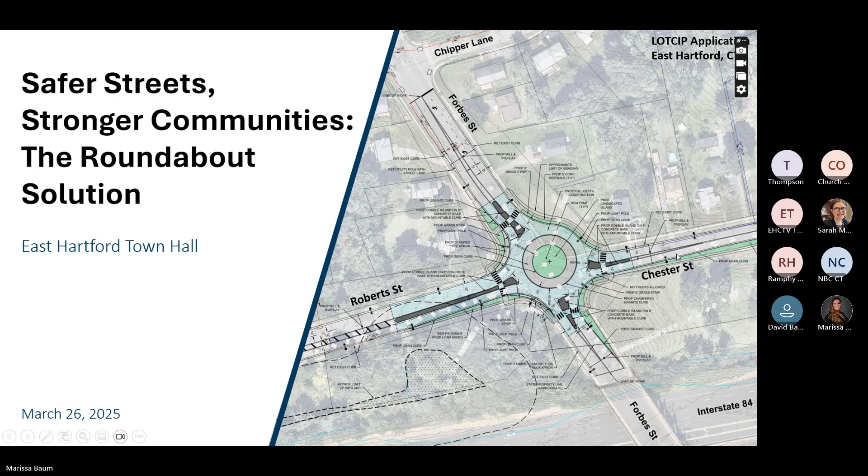Oh, thank you. All right. So my name is Jason Ouimet. I am a senior project manager with the Beta Group. Beta provides engineering design services for several municipalities throughout the state, including the town of East Hartford. Joining us today is Scott Bushee. He is a principal engineer and chairman of the Roundabout Committee at Connecticut DOT with over 2 decades of experience planning and designing roundabouts throughout the state.

As I mentioned earlier, we are also joined by Honorable Mayor Connor Martin, along with Alex Trujillo, Director of Public Works, as well as Mac Hawkins, Chief of Police, and Doug Wilson, Town Engineer. So right now, I'd like to hand over the presentation to Scott Bushee to discuss the operation, safety and public benefits that roundabouts provide throughout the state.

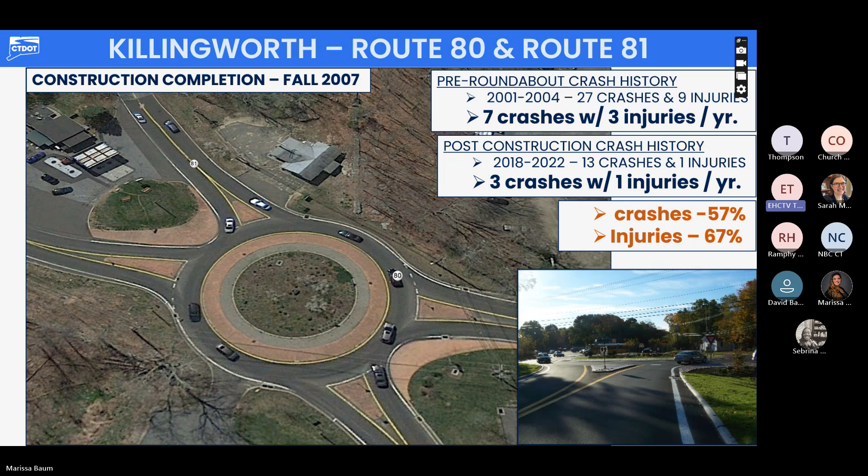And when I see crash reduction, especially injury reduction, that's success, right? Somebody didn't get hurt, somebody didn't go to the hospital, somebody's able to continue on with their life that day, and that's somebody's family member. So that's important. Another location we have, this one was in West Haven, Connecticut. Another one we looked at.

It had problems with left turning vehicles in and out of the side street. People were having a hard time finding a gap. We had a motorcycle fatality here. And the initial request was to put in a traffic signal. And we knew with the radius of that roadway, the geometry, the higher speeds, that the signal wasn't really the safest solution. We built a modern roundabout and had great results with it. We reduced speed significantly.

We shortened the pedestrian crossings, making it safer. They're actually two-stage crossings. We've got that nice gateway treatment with the flagpole and plantings. That really became kind of an anchor for those businesses on the corner as well. Over the last decade, after we built that, I watched several of those businesses grow and expand. They have outdoor dining, new businesses came in after.

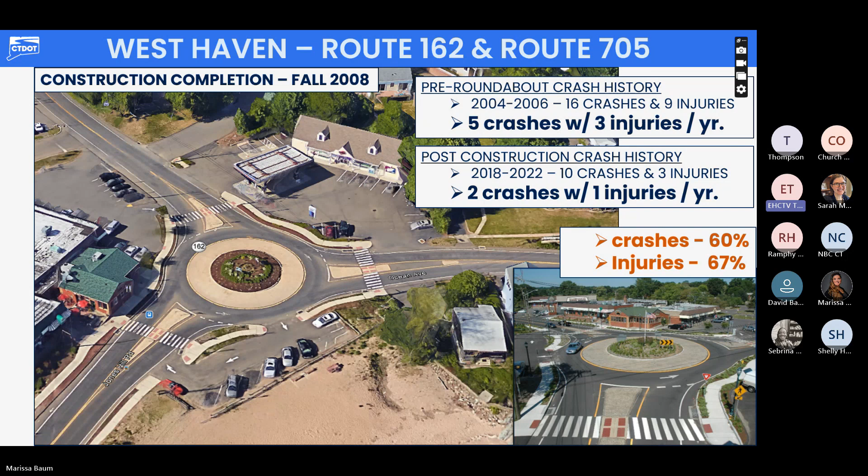The opposite side had kind of a dilapidated gas station repair garage that was bought out by a convenience store and all rebuilt, remodeled, looked beautiful. So that worked out very well. Reduction in crashes by 60% and injuries by 67%. Certainly a success there in terms of safety.

Roundabouts are safe because they're lower speed. And what we learned from studying crash data, if a pedestrian or a cyclist gets hit and the speeds are around 20 miles an hour, 9 out of 10 survive. If a pedestrian or cyclist gets hit and the speeds are around 40 miles an hour or higher, only 1 out of 10 survive.

So think about our traffic signalized intersections. When it's a green light and we're going through that on the green light, what kind of speeds do we have? So if we can employ more roundabouts and get the speeds down to 20, 25 miles an hour, 9 out of 10 pedestrians survive if they're involved in a crash.

Bicycles do very well in roundabouts. If we look at that teal line going through in the middle, that's the woman up in the top right corner. She's an avid cyclist, very experienced. She's riding through the circular roadway with traffic at speeds 15 to 20 miles an hour. She can do that, keeps right up with traffic. That's the safest place for a cyclist to be in the roundabout, being seen right with traffic.

The gentleman in the middle of the picture, he's kind of pushing his bike on the crosswalk. Maybe he's a little less experienced, a little less confident. He's going to exit the roadway at the crosswalk, go up on the sidewalk, become a pedestrian. Then at the crosswalk, he's going to look to his left. If it's clear, he's got a gap. He's going to cross to the center island, which is an area of refuge.

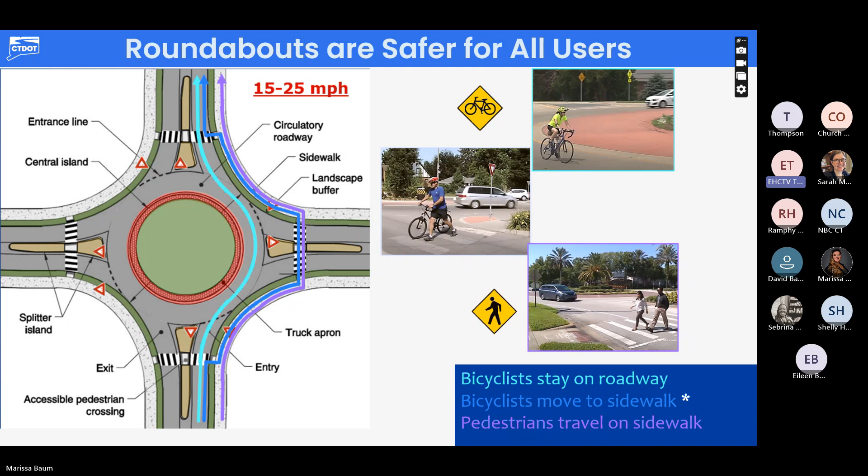Meanwhile, the pedestrian's crossing behind the vehicle, out of the space of the driver making the decisions, which is a big difference between roundabouts and traffic signals. If you're at a traffic signal and there's a crosswalk, that crosswalk's in front of the vehicle and in front of the driver whose eye is looking up at the light to see if it's going to turn green and they can go.

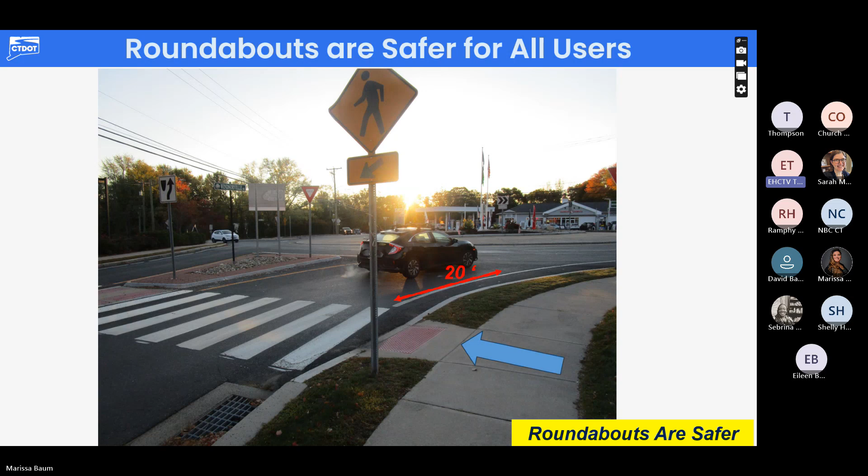And maybe that driver's also looking to their left to process vehicles coming at them, and are they going to stop? And maybe a pedestrian steps off the crosswalk on the right side of that vehicle as the light turns green. All these decision-making processes going on and the crosswalk's in front of the vehicle. Roundabouts, it's at the rear of the vehicle, significantly safer in addition to the lower speeds.

I mentioned it's a two-stage crossing. You go out to the center island, that's your refuge area. You can take a break, stop. You look to your right. If it's safe, whenever you get the gap, you go. You don't have to cross the whole roadway at one time.

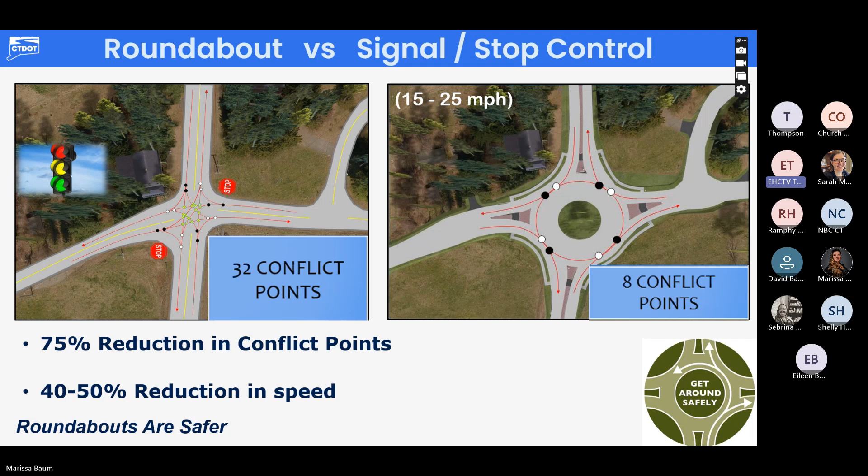Roundabouts have fewer conflict points because we've eliminated the left turns. All turns at roundabouts are right turn entry, right turn exit. With that, you don't have the crossing maneuvers. This eliminates the T-bone type crashes, the severe sideswipe crashes that would occur. So we get a 75% reduction in conflict points and a 40 to 50% reduction in speeds at most roundabout locations. Another win for safety.

Another location not too far from us, Ellington, Connecticut, the old Five Corners. This was stop controlled.

Horrible capacity. We built a modern roundabout, nice gateway treatment, municipal signing. The congestion cleared up, went away. Reduced injuries by 70%, but this one really made traffic operations much more efficient. At a roundabout, you pull up to the yield sign, look to your left. If it's clear, you go. Very simple. Multiple legs can enter the roundabout at one time.

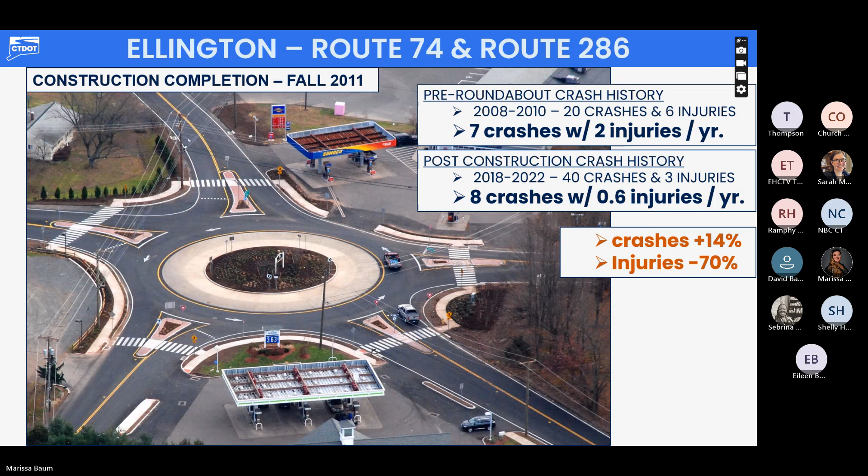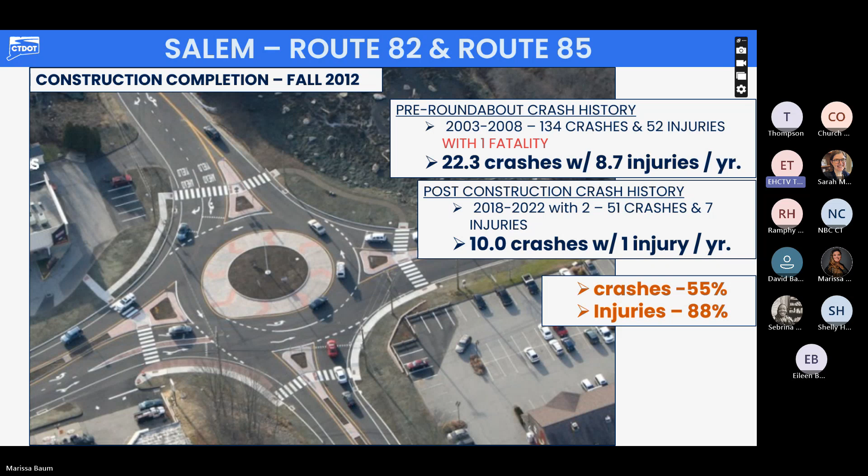55% reduction in crashes, but 88% reduction in injuries. That's big. That intersection had over 22 crashes a year as a traffic signal. We get it down to 10 by putting in that roundabout. It's a lot of lives saved. People didn't get hurt.

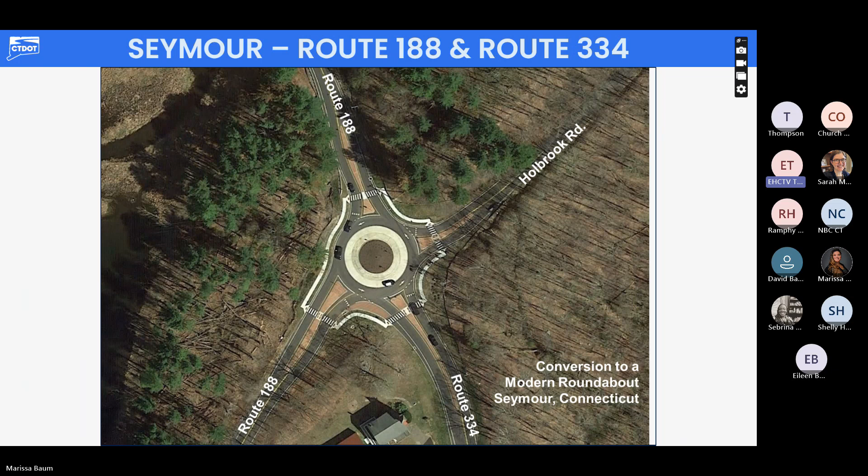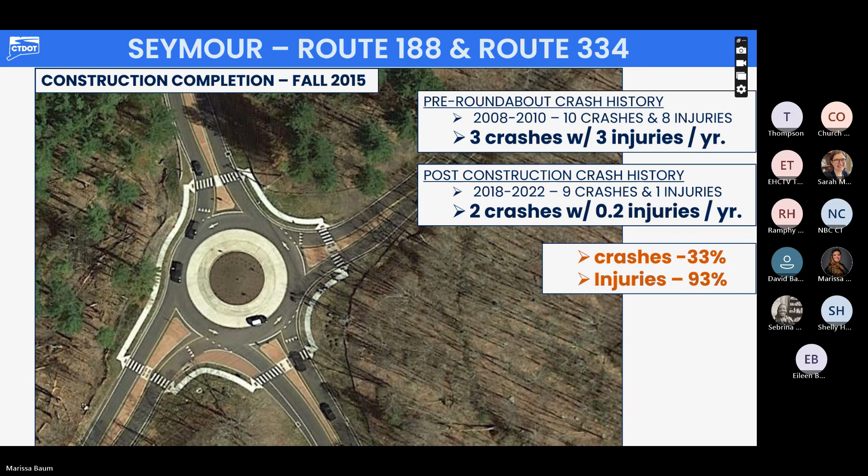Another traffic circle we upgraded with modern roundabout features. Look at the straight geometry. Imagine there's high speeds. Employ these modern roundabout features. You can't go fast through that intersection. Look at this geometry. You can't physically drive it very fast. The geometry controls the speed, not the traffic light. Reduced injuries here significantly. Reduced crashes.

Monroe, Connecticut, it had a stop sign on the side street. It's two state routes, 110 and 111. Significant traffic congestion at the stop sign, people having a hard time making a left. Very high speed crashes here with severe injuries because of the speed and people pulling out of the side street, stop control condition. Built a modern roundabout with a nice gateway treatment, nice sidewalks.

This provided great access up to the community center, the library, and town hall from the adjacent community. So it enhanced pedestrian connectivity significantly, kind of created a nice anchor, made the area look good. Beautiful uplighting in the center, which helps with nighttime safety. The uplighting is not just decoration. It makes people see the roundabout at nighttime from a distance.

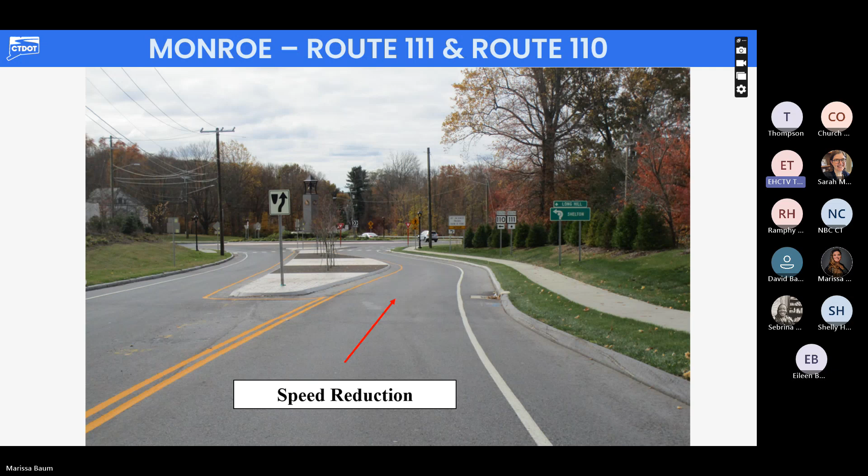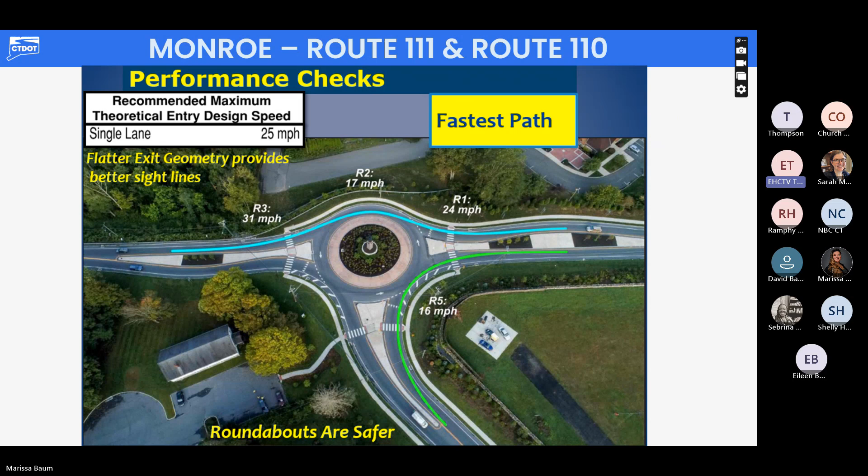And here's the deflection coming in. Nice speed control. That's why people go slow through roundabouts. Can't drive fast through that. The deflection. And here's the engineering behind it. We measure those radiuses, and that tells us as design engineers how fast a vehicle could reasonably drive those curves. So this one shows the entry at 24 miles an hour, the circulating roadway at 17 miles an hour. That's slow, right? That's in the range, the speed where 9 out of 10 pedestrians survive. So that's our goal.

There's a little video. This is sped up just so we can get through the video quicker, but there's a school bus. Here's a tractor trailer coming through. This is your interstate trailer, WB62. Rear wheels are up on the truck apron. It's another school bus. On the school buses, the wheels don't go up on the truck apron. Only freight goes up on the truck apron, not passengers. But it works very smooth, very simple. Reduced injuries by 60%. So that's a huge win for us. Looks beautiful.

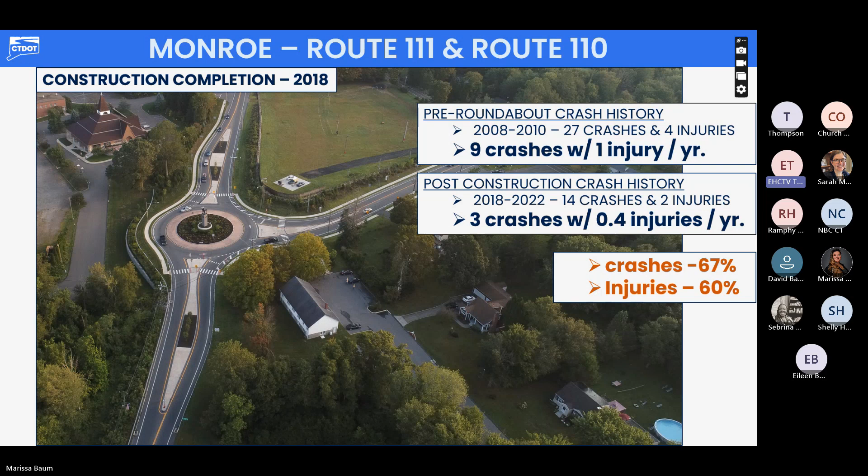Granby, Connecticut, Route 202. This is a real interesting story and close to my heart. We had someone on the Volunteer Ambulance Association that wrote us at DOT and said, I'm responding to a lot of people getting hurt at this location and taking them to hospital.

"Can you please put in a traffic signal here?" That was an emergency responder that wrote that letter to us. This location had stop signs on the side street. We knew with the high speeds and that straight roadway that the traffic signal on the green ball was still going to result in high speeds.

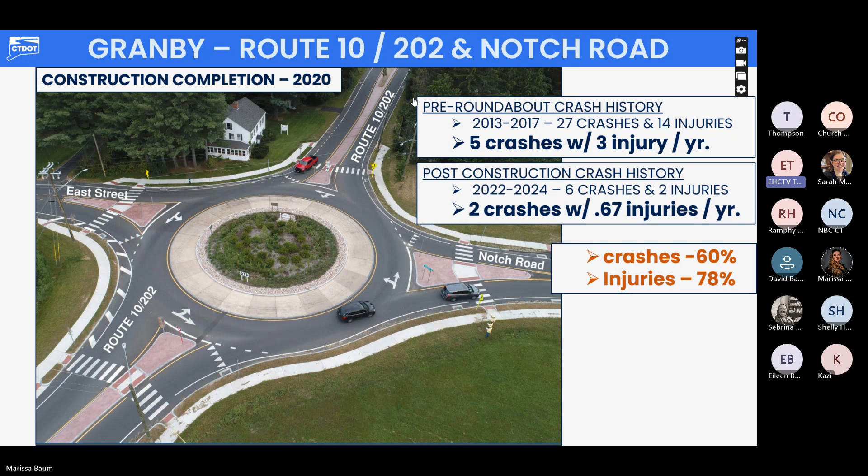We knew the roundabout was the right solution, worked with the community and the town. We got this roundabout. Here's a school bus going through that. Very simple, very safe. Speeds are low for everyone. We've got nice pedestrian accommodations, plantings, gateway treatment. Reduced injuries by 78% at that location, and we've reduced speeds from 50 miles an hour down to about 25, making that safer for that community.

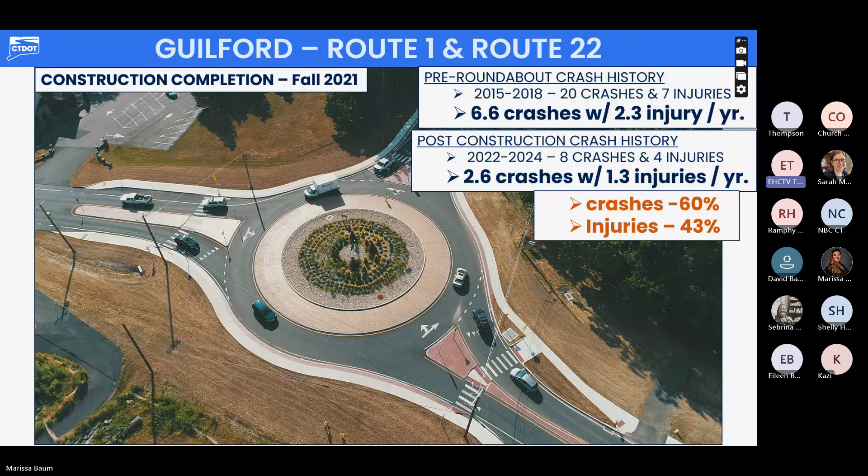Guilford, Connecticut, this very awkward configuration, put that into a roundabout, cleaned it up. Works very smooth, very simple, lower speeds, safe for all users. Nice plantings in the middle. Reduced injuries by 43% at that location. Every one of these roundabouts has been a success in terms of safety.

All right, well, thank you, Scott. So as you can see, Connecticut DOT has done an excellent job with planning, designing, and constructing these roundabouts throughout the state, so they deliver the public safety benefits that Scott had just discussed. So now municipalities are seeking to build upon these successes as the towns continue to experience significant injuries and fatalities at traditional intersections. So what I want to show you right now is an example of an incident in East Hartford at the signalized T intersection of Main Street and Connecticut Boulevard.

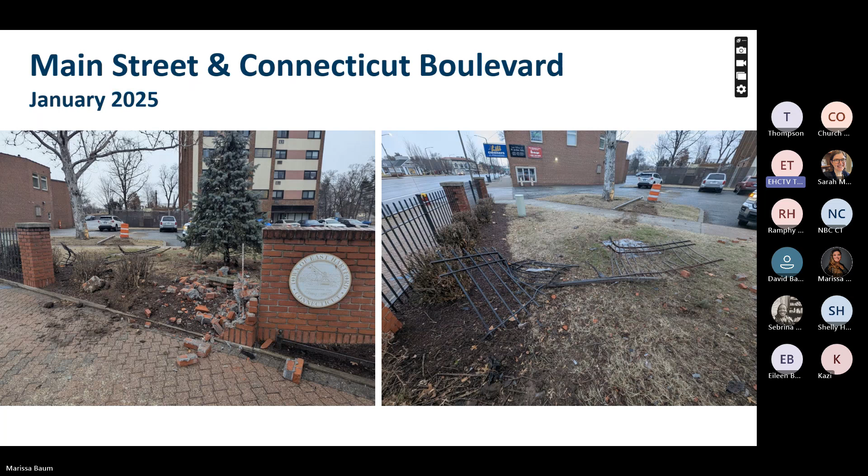Hey, this question is for Doug Wilson. So Doug, we've been assisting you with the design of a few roundabouts throughout East Hartford. Can you elaborate on the status of each one of those, as well as future potential opportunities for those roundabouts? Absolutely. Thank you.

We know there's a large volume of traffic going through on Main Street. We know it's high speed. Can it be made to work with roundabouts in a way that'll be functional? And can we get the funding through Greater Hartford Mobility? Be great to see that happen. It'd be part of the mayor's vision for improvement to Main Street.

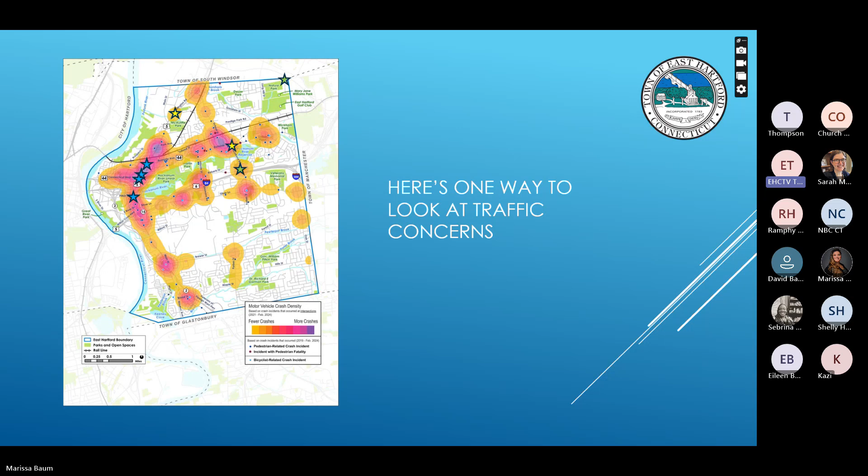So the blue stars, you've got the DOT focusing on Main Street and Main at Pitkin. And then we're going to focus on the lower green star that is at Forbes, Chester, and Roberts. Now, here's what happened. We had a complaint about speed, serious, persistent, insistent complaint about speed at that location.

It's about halfway through from Forbes Street, which is the blue line off to the left, to Great Hill, which is the T intersection on to the right. It is a very straight, flat, wide section of road, and speeds can get quite high. And you would think if you go to a standard default position that you would want to put a speed hump in that area. But what we decided to do is actually take a look at some of the numbers and see what we were really getting and do a bit of study.

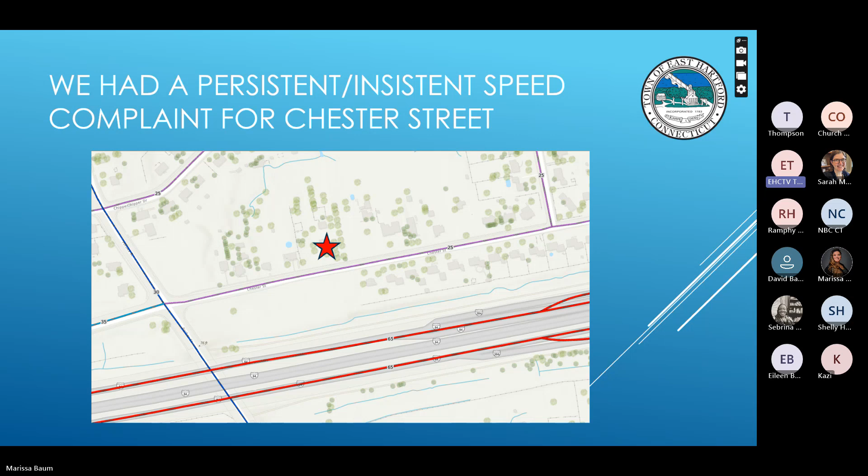So the police department has the your speed signs, and they can capture some information for us, and they did do that. And there's a couple of things that are happening here. One is that the average daily traffic is pretty low on these. It's just not that high. There's 1,500 vehicles a day, something like that. But the speeds, generally, the average and that 85th percentile speed, which is, you take away the top highest 15% of speeds, those are typically falling in the 30, 35 mile an hour range.

But then you look at those max speeds, 64, a 71, a 90, and a 75. Wow, okay. So where's the speed problem? It doesn't seem to be in the range of most drivers, everybody below that 85th percentile. Those max speeds are pretty bad though. And you'll see in the picture that we're at 25 miles an hour on this section. Now, you could argue that it's straight enough and clear enough and houses are back far enough at 35.

But instead, what we decided to do is that we knew that a speed hump was not going to work at this location because of all the reasons that Alex had enumerated before. I won't revisit those. But what we did is we went back to the intersection of Roberts, Forbes, and Chester. So now we're on the east side of that. These pins represent the serious and property damage crashes that have occurred at a traffic signalized intersection here. And you said, gee, that's not very good.

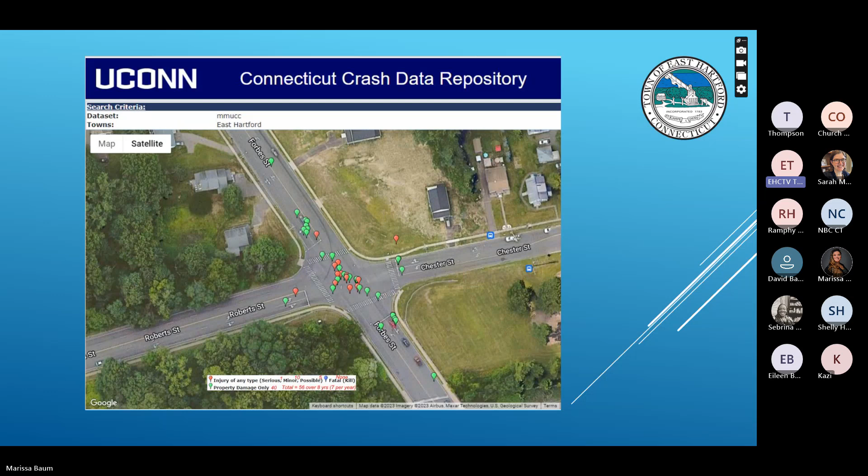And wait, if you take that speed and you bring it through a signalized intersection, which means that when the green ball is on you, or you think you can hit the green ball, then you can speed through that. You're already at 50 or 60 miles an hour, and you can basically jump it because look at the grades that happen right at this light. You can't see from one side of the signal to the other whether or not there's a vehicle on the other side.

So if somebody's going to turn left and they're pushing the end of their light, and you're going to speed through and you can see how you're going to catch the light coming the other direction, the two of you might meet and in a serious way. And then you're going to fall back to the east and you're going to be going down that stretch that heads to Great Hill, which is a 3-way stop. And you're going to be at very high speeds with no reason to do that whatsoever.

So based on these decisions, we wanted to look at a roundabout to make this better. And we think we have a hit here in terms of a single lane roundabout that will remove the traffic signal at this location and cause those nice angular movements, reduce those conflict points, as Scott mentioned, and get everybody moving through here with less delay in a safer way and eliminate the opportunity for folks to come either east or west on Roberts and Chester

at high speeds. And really, if we have some crashes, we're always going to have some crashes. People make mistakes, but they're going to be low. They're going to be no injury or low injury, and they're going to be just property damage. Two people sort of competing for the same space, not two people trying to kill each other by actually hitting each other.

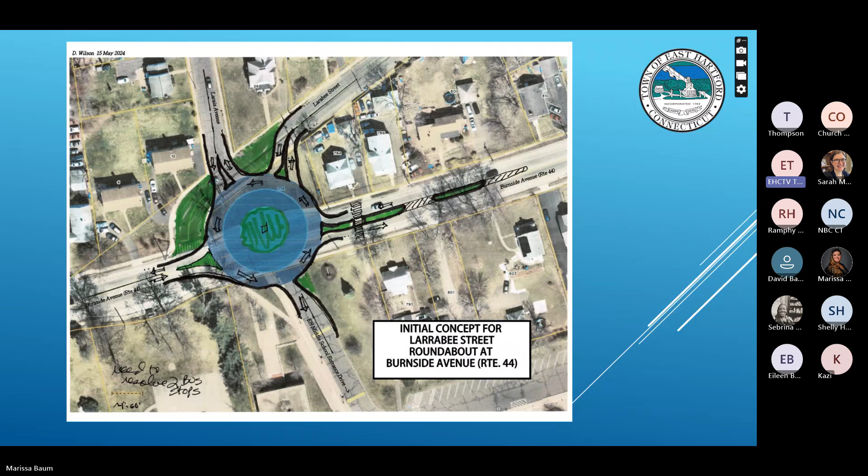And they died because they were trying to come out of that gas station and take a left. They saw they were clear of the car in the right lane. They were not clear of the car in the left lane. They got T-boned and they died.

So now I don't want to have more deaths, but Route 5 is basically a machine of moving vehicles very fast, and we have slow-moving vehicles entering and exiting onto it, and people see that yellow light and think it might turn red and they'll speed up. This is what can happen. We don't want to see this happen again.

So we've learned some lessons in terms of taking a look at what's happening in the area and going back to some data and seeing what the actual results are of the speed studies. We're checking traffic, the speed classification. It's more than a singular issue of they're speeding at a point.

Because as you've seen on Chester, we moved off that point to an adjacent location that really makes a lot more sense, and then try to figure out how we can shape that driver behavior so that something that's just statically built in the environment, not electrically controlled and not overhead needing maintenance like a traffic signal, can actually help make things safer.

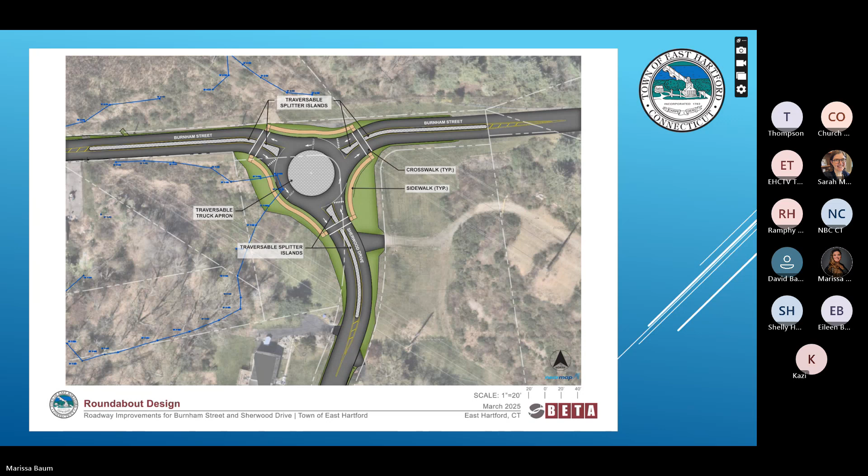Yes, please. Three items you asked questions on. I'll give you a response. In terms of concerns about pedestrian crossings, there's enhancements that we can do on the roundabouts to improve opportunities for pedestrians to safely cross. And if you have high pedestrian density areas, something certainly would be considered in the design.

One of them is a raised crosswalk, very effective in getting additional speed control, but also highlighting the pedestrian crossing area. Those combined with RRFBs, the rectangular rapid flashing beacons put on the side of the road that the pedestrian pushes the button, the lights start to flash, in addition to the raised crosswalk, have been shown to yield very high success rates in vehicles stopping to allow pedestrians to cross. And it's the law in Connecticut. But those are some additional things that we can do to help with pedestrian crossings.

There have been very complex roundabouts elsewhere in the country where they're actually signalizing some of the legs of the crossings to help with high traffic areas and crossings. I don't think we're going to have that anywhere in our area, but certainly for some of your local ones, a raised crosswalk and additional RRFBs added at the pedestrian crossings are something that we could consider and I think would help out quite a bit.

As far as the trucks and the rutting, I will note that the example that I showed in our neighboring town here, Glastonbury, those roundabouts are a little different than what we would design on a state roadway. They're not designed for the tractor trailer that I showed in the picture at all. The diameter on those is probably less than 110 feet each. It may be even closer to 100 feet, 105 feet. For single lane roundabout design, the minimum diameter of roundabouts is 120 feet. And that's some of the reason that there's some rutting in those areas.

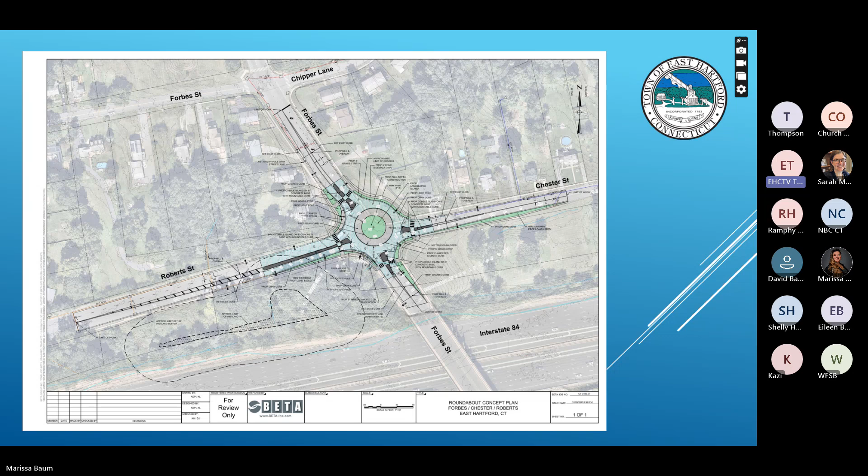The question I had was about the pitch on Chester and Roberts Forbes. Is it going to be changed to accommodate so folks can see what's over, or are you going to keep it the same as displayed? Yeah. It definitely needs to be flattened. Yeah, it'll be flattened and then there'll be fill grades that will take up the slope so that we get a flatter area where the circular disc of the roundabout occurs. It can't stay at these pitches. It really wouldn't work very well.

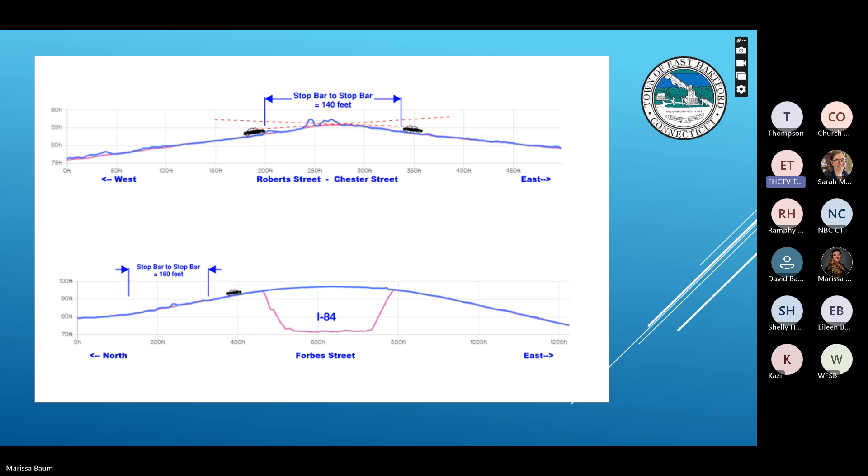Thank you. And then I had one more question. What was the timeline for these roundabouts? I'm just curious. Is one going to be ready sooner than others? Or are they going to try to implement a handful at once? Okay, so the four on Main Street are conceptual design right now. Go way back.

Okay. The 4 cyan ones on Main Street are conceptual right now, and they're being studied for viability at all. The 2 yellow ones, maybe someday if we can find a source of funding for them, would be a place where we might consider them.

The lower green at Forbes, Chester, and Roberts has a selection of over $3 million from CRCOG that has been given to DOT. We're waiting on a commitment to fund from DOT. That will then allow us to engage with our consultant, who can then complete the design. I would say we need the design to probably take a year or so, and then after that, we'd be able to go out to bid, get a contractor on board, and construct.

The one at Burnham and Sherwood is a little, I mean, don't want to speak too much for Jason, but a little bit farther ahead. It is self-funded, and we will be able to do the eastern section of Burnham and Sherwood with it, with the roundabout in between. I'm hoping next year. That's kind of my goal for that. I think they should be able to do that.

Thank you. Thank you. Any other questions, in person? Yep, Deb.

Deb Arietta. I live over on Sunset Ridge Drive. I wasn't planning on getting up and saying anything this evening, but I did have a situation that happened to us last night, and it involves the considerations of Route 5 and Main Street areas. Last night, the state police had closed down 91. We were at Savvy's Restaurant, which is off of Main Street. A number of tractor trailers, tandems, et cetera, had to come through East Hartford because of that closure.